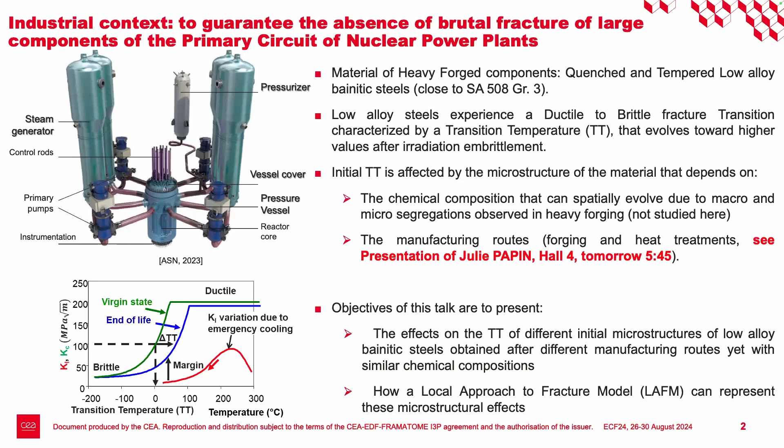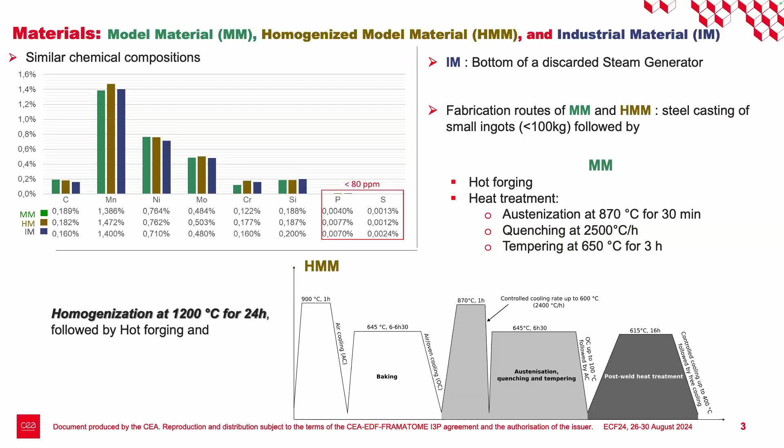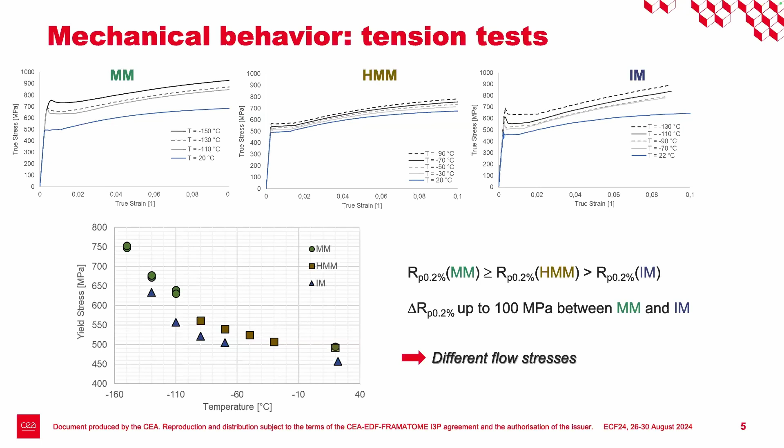So you can see that there is a large difference between the three materials, and we try to understand what is the origin of this from the microstructural point of view, and how we can integrate these elements into a local approach to brittle fracture model.

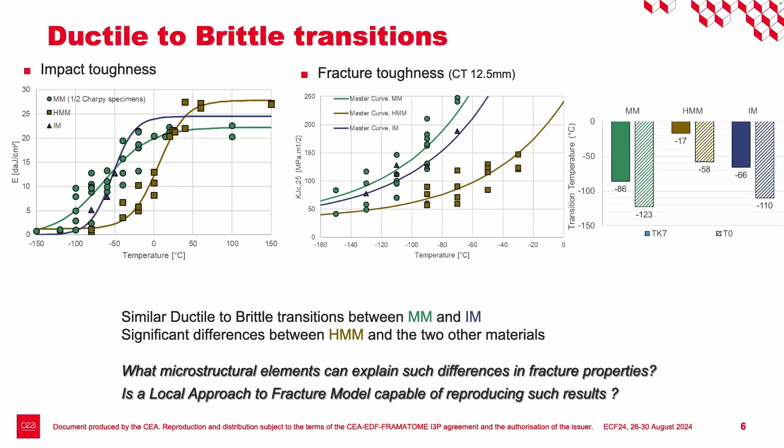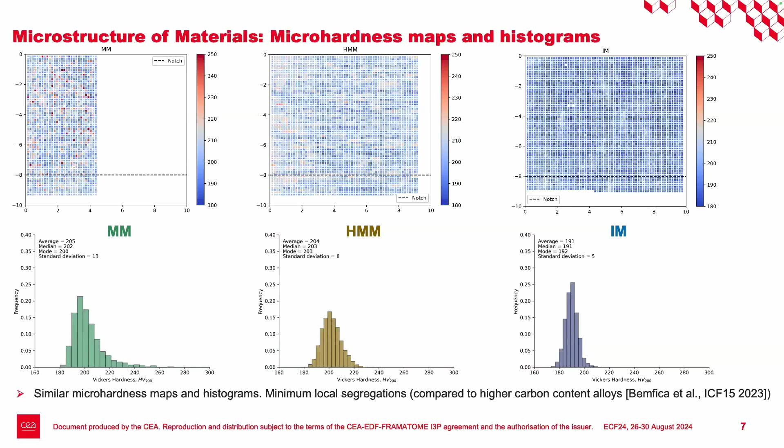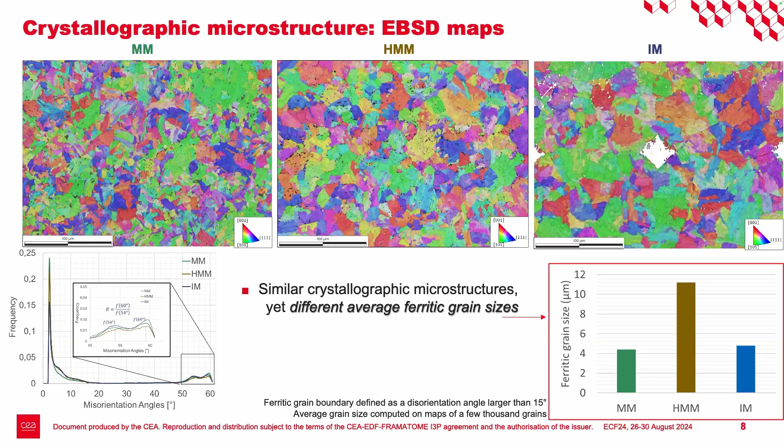And this is the key microstructural element that we need to introduce into the modeling. We have also performed a lot of thorough fractographic exams in the brittle domain, both in Charpy and CT specimens for the HMM material and IM material. And almost each time, we always found only cleavage initiation and propagation, no major intergranular fracture surfaces.

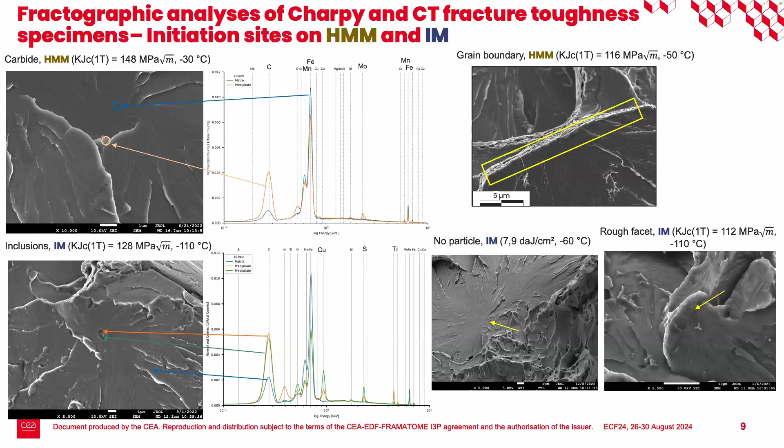And the initiation of cleavage was always, quasi always on the grain boundaries. Sometimes, like this example, we couldn't find any specific particles that initiated the cleavage fracture. But in a lot of cases, we could find some very small carbides that have been enriched in manganese and molybdenum. And in only one case, we could find a cleavage initiation from an inclusion inside the grain.

If we sum up all these results of fractographic exams, we can say that in the vast majority of cases, cleavage initiates from grain boundaries. And when we find precipitates, these precipitates are carbides. And only in one case could we start cleavage from an inclusion. So for the rest of the talk, we will consider that cleavage initiates from carbides.

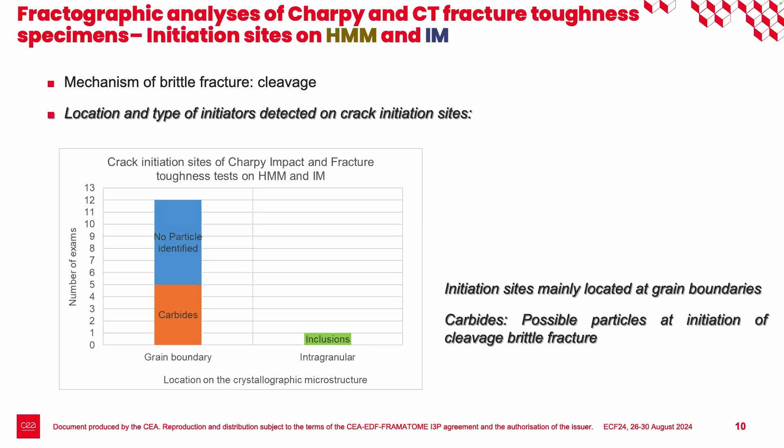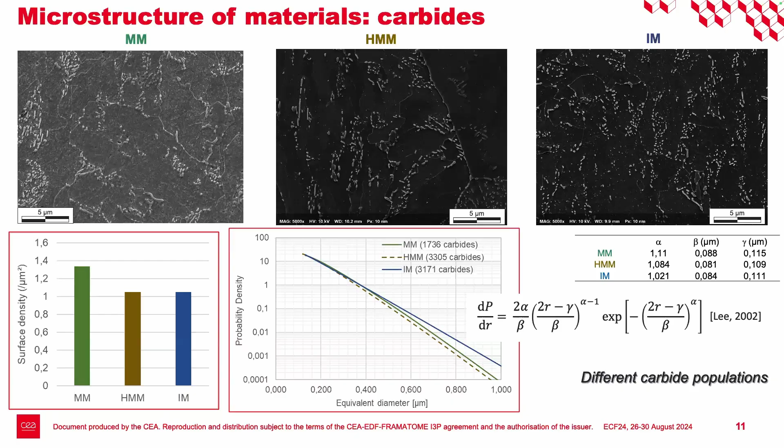So now let's put this on local approach to brittle fracture modeling. So the key element of this modeling is to consider first that crack

Oh, yeah, thank you.

That crack initiates from carbides as soon as we have plastic deformation of the matrix. And once this happens, the initial size of the crack is equal to the size of the carbide from which it has initiated. So once you have a crack, the probability for this crack to propagate is given by a Griffith criterion. So the probability for a crack to propagate is the probability to find a crack larger than a critical size. So this is given by the Weibull distribution I have shown you before when we were studying by image analysis all the carbide sizes.

But here we will just modify a little bit the critical size, which is not just a Griffith criterion. We use instead a modification of this critical size that takes into account D, which is the ferritic grain size, because we have seen that for the HMM material, this material has a much larger grain size.

And this comes from the model of Petch published in 1986 that says roughly that if you have a larger grain size, then it's easier to have a longer pileup of dislocations that can help open more easily even very small cracks that have been initiated on small carbides. So you have to consider smaller carbides for crack propagation. That's why, if you increase D, you reduce the critical size.

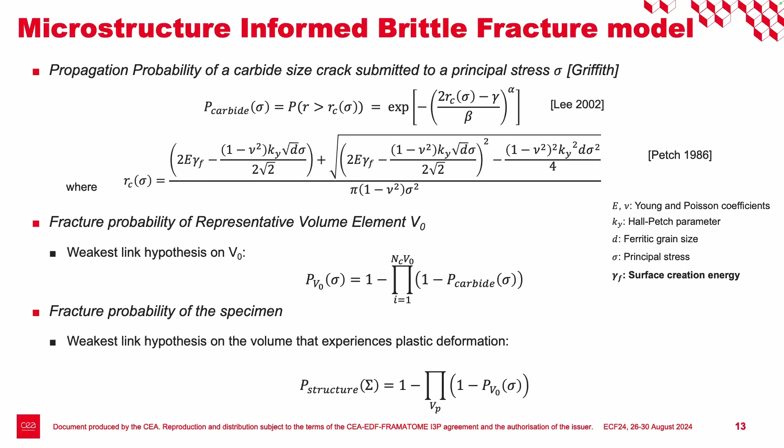So this model is used as a post-treatment of finite element elastoplastic simulation of CT tests. So we use this type of meshing, and the mechanical behavior that we use for this simulation is identified on the tension test of each material, the MM, HMM, and IM, at each temperature of the fracture toughness test.

And once we have done this, for each time step of the simulation, we can extract the plastic strain fields and the stress fields, and we can compute the fracture probability for a given value of KJ. And we can observe this type of curve for different temperatures for one material.

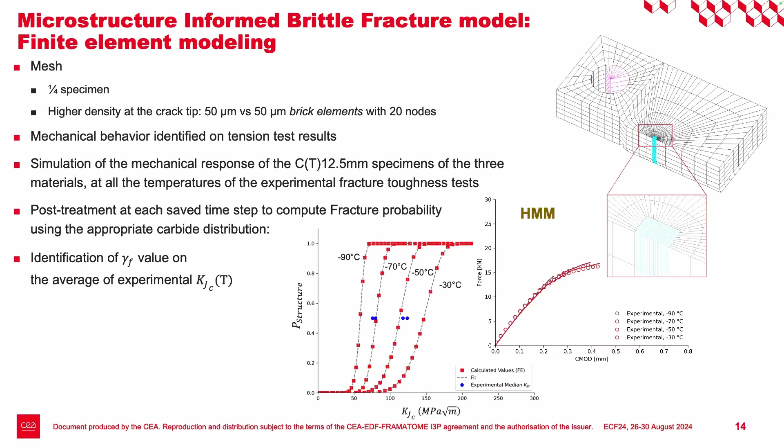Finally, the results of the model. So in the points, you have the experimental results for MM material, HMM, and IM. And the curves are the probability solution of your model. And what you can see is that if you use the correct mechanical behavior, the correct distribution of carbides, and the correct average grain size of each material, you can describe all the experimental results with only one constant value of the energy parameter, which is the last free parameter of the model.

So we have only one parameter that is kept constant. And basically, this means that your crystallographic microstructure has the same crack-resistant property. And if you do this with only one constant parameter, you can describe the experimental results that were quite different from one material to another.

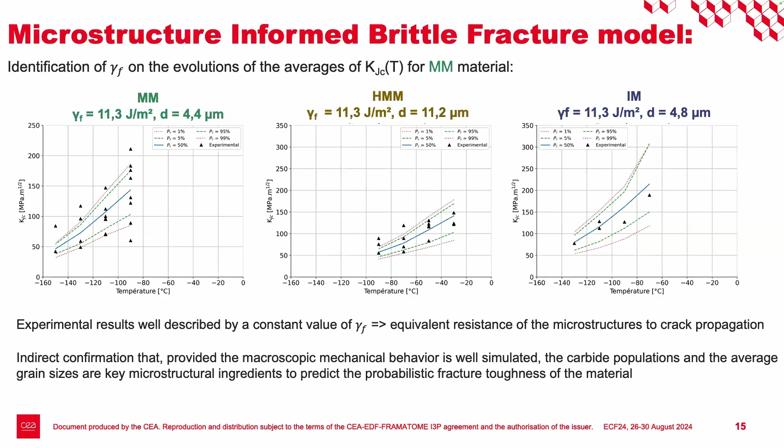Okay, and so I skip now to the conclusion, just to sum up what I've said, but if you have questions, I will be happy to answer if I can.